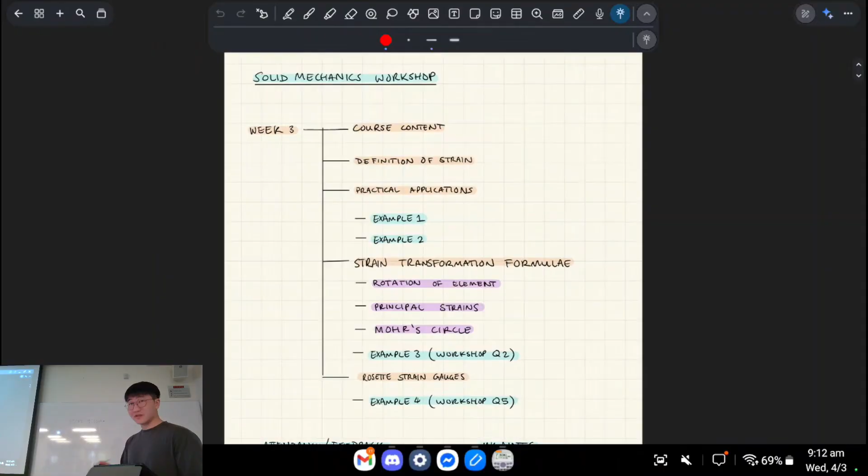Basically, today we're going to be talking about strain, and it's going to be fairly similar to the last 2 weeks in that it's fairly fundamental, similar to stress, to the mechanics of solids, and also we'll be talking about the Mohr circle rotation stuff again, basically. So yeah.

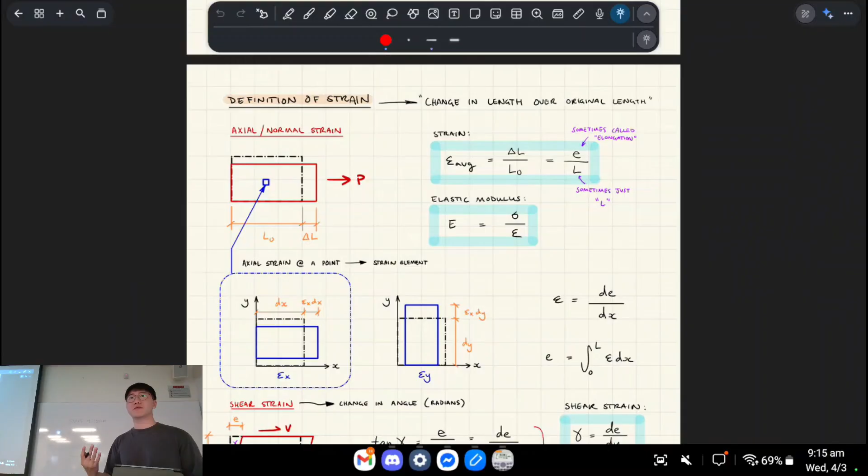It's better, like this week I've included 4 examples. It's better to see how the formulas are applied to understand this content than just see all the formulas laid out, because some of these are derivations and stuff as well. So this is like a compressed version of what you see in the lecture slides, for the formulas.

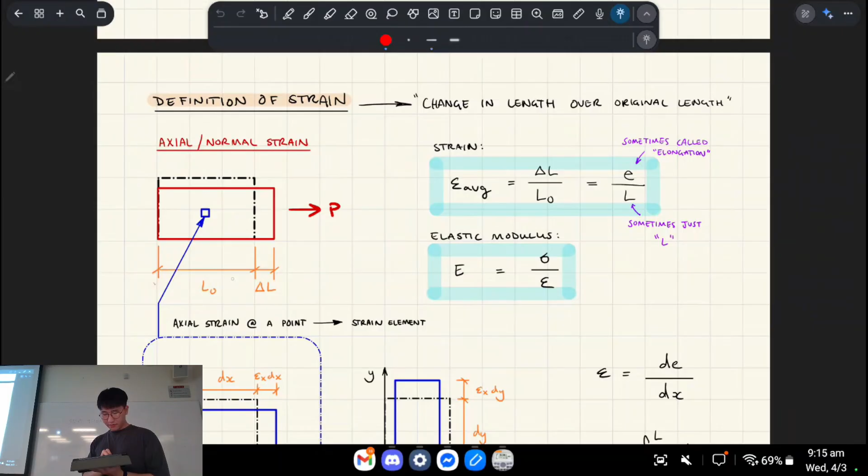But I will briefly run through them. So basically, if you imagine your solid element, similar to last week, and you're stretching it, say in tension, it's going to elongate. So if the original length of that element was L0, it's going to extend by some amount called, let's call it delta L.

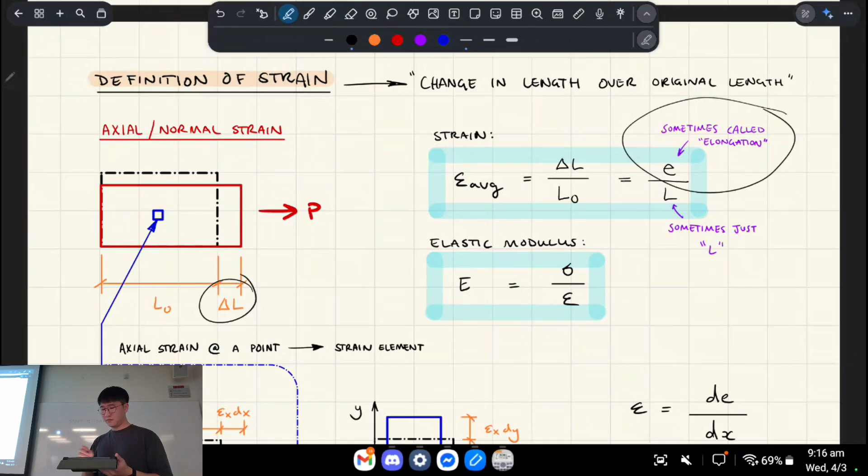Sometimes you see this as E, okay, but it's the same thing. So delta L and E, E stands for elongation, right? Same thing. And then dividing that by the original length, or sometimes it's called L.

That's what strain is, okay? That's what axial strain is, so average axial strain, I should say. So what you'll find is that this is unitless, right? So if this is in millimeters and this is in millimeters, strain is unitless, basically.

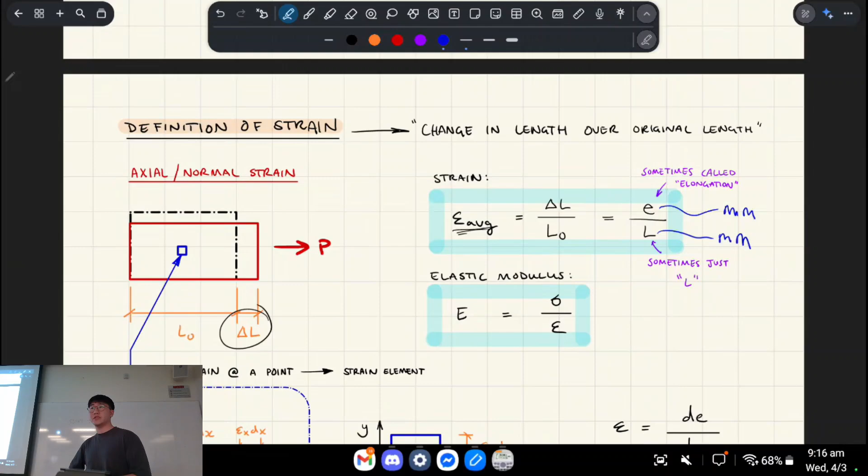Another thing to keep in mind is elastic modulus, but I actually don't think we talk about that too much here, okay, we'll talk about that next week. That's a material property, basically. We'll talk about the material curves basically next week.

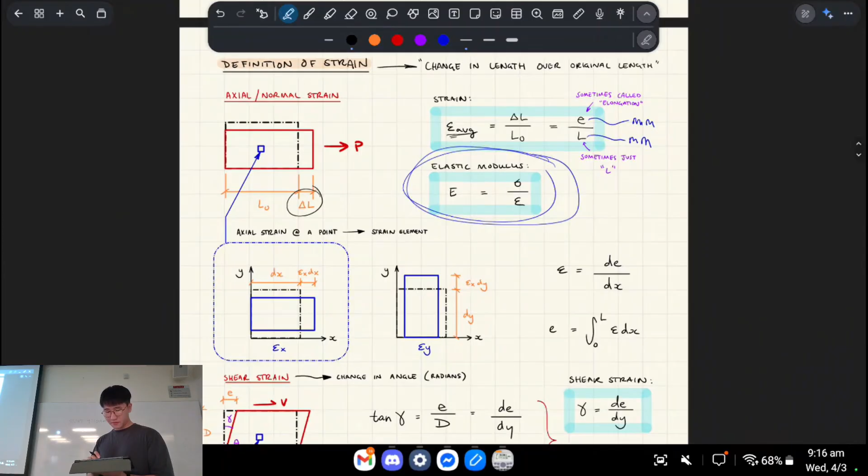Okay, so we'll also talk about next week Poisson ratio. So if you imagine like, I had Play-Doh, but I didn't bring it. But if you imagine like Play-Doh, and I'm stretching the Play-Doh, it gets thinner, like it starts necking, as I'm pulling it.

So that's like a pretty exaggerated way to imagine Poisson ratio. The idea is that as you're elongating something, in that longitudinal direction, it kind of shrinks in the radial direction, right? Just keep in mind.

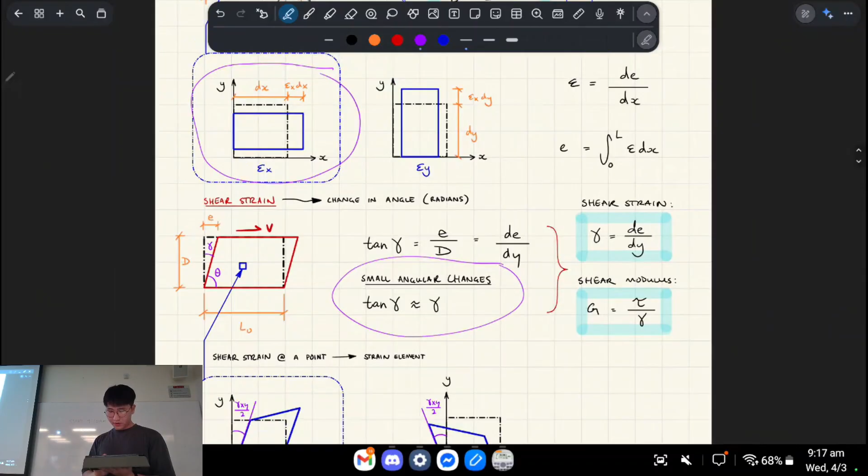Okay, derivations. Shear strain. I'll explain small angular changes in a bit, but what you have to know about shear strain is it's also this idea of something in millimeters divided by millimeters, right? But it's in a different kind of direction. So it's like you're dividing it as a perpendicular thing. So instead of longitudinal, like that's the stretch divided by the length.

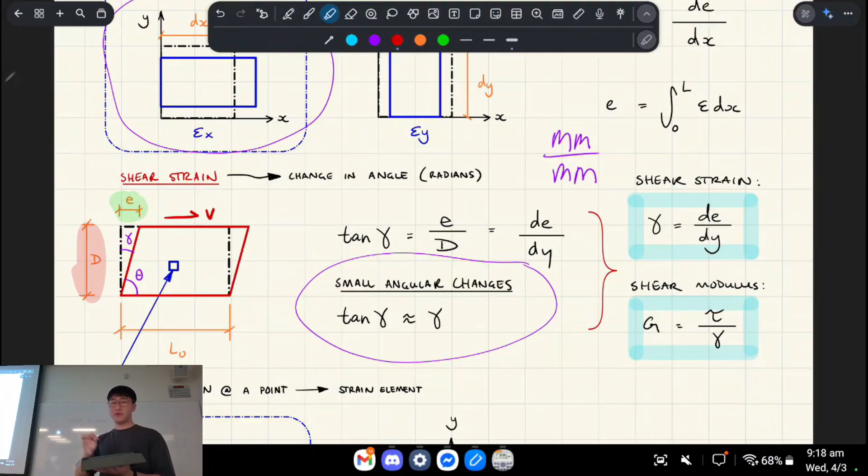This time you're doing the elongation that way, and then the perpendicular dimension. Does that kind of make sense? So if you have like a stack of papers, and you push it at the top with your hand, and you're sliding it that way, it's gonna shear. Essentially, that shear deformation in that direction divided by the height of the stack of papers, right? That's your shear strain.

And then there's also an equivalent thing to the elastic modulus, but it's the shear modulus, which we'll talk about next week. That's also a material property, basically. That's the shear stress divided by the shear strain. Okay, so these are all a bunch of formulas.

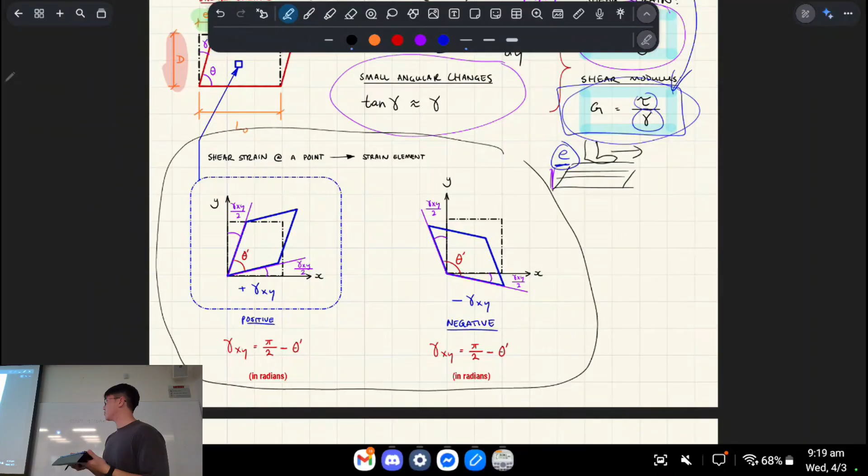All right, and shear strain on an element, you have to basically draw it out on an XY plane as kind of a rhombus, I guess. So the shear strain is this portion and this portion added up. And basically it'll be positive if your shape is narrowing in angle, like that. So that's a positive shear strain if your angle becomes more acute, right? And if it becomes more obtuse, then that's a negative shear strain. Okay, again, this is easier to see when I show you the examples.

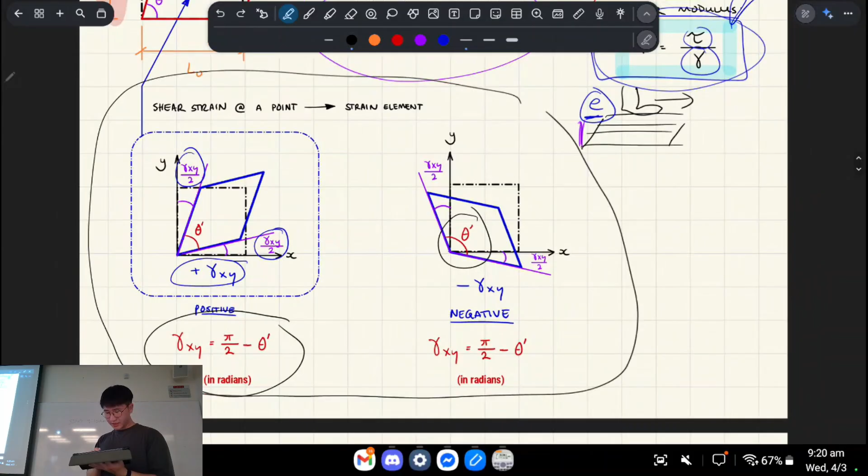But the important thing is that you're going to be mapping these in radians rather than degrees. I'll tell you how to switch that over on your calculator when we get up to that. But the reason for that is basically radians are unitless. You can think of them as unitless, right? Similar to how when you divide millimeters by millimeters to get axial strain, you get something unitless. So to map these against each other on a Mohr circle, you have to have two unitless axes, right?

Okay, that's like the overall rundown of these formulas. Does anyone have any questions about that?

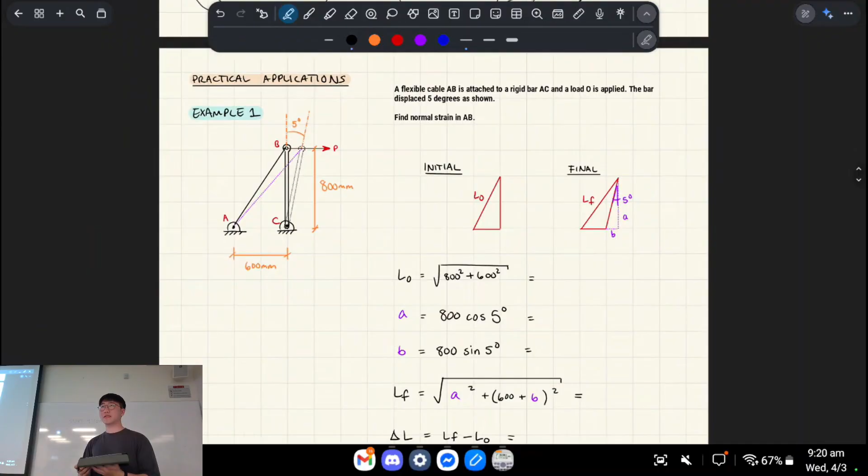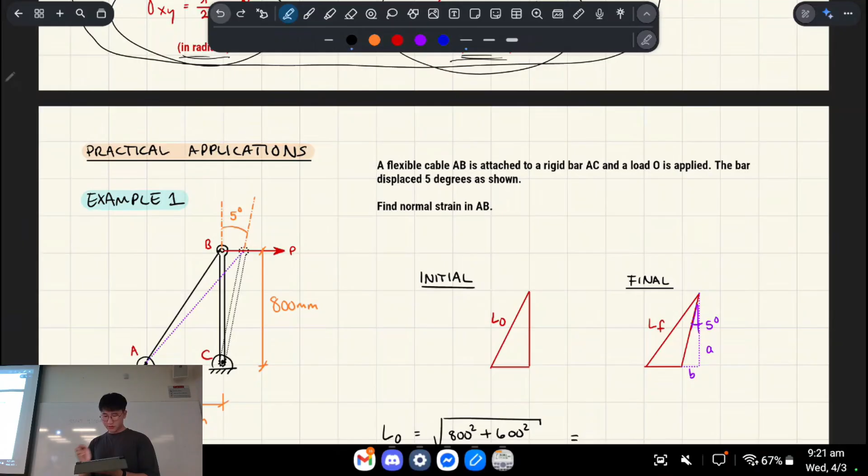Okay, cool. All right, let's start with something pretty basic. So if you imagine a rod, and it's pinned at the bottom to the ground, like a pin support kind of thing, and there's a cable that is suspending it at the top, and you pull it to the right, as drawn in this diagram. If you're told that there's a 5-degree angle change from the original completely vertical shape of this rod to when it moved a bit, I'm just gonna pull up my notes. Right, yeah, and now it's tilted a little bit, tilted 5 degrees.

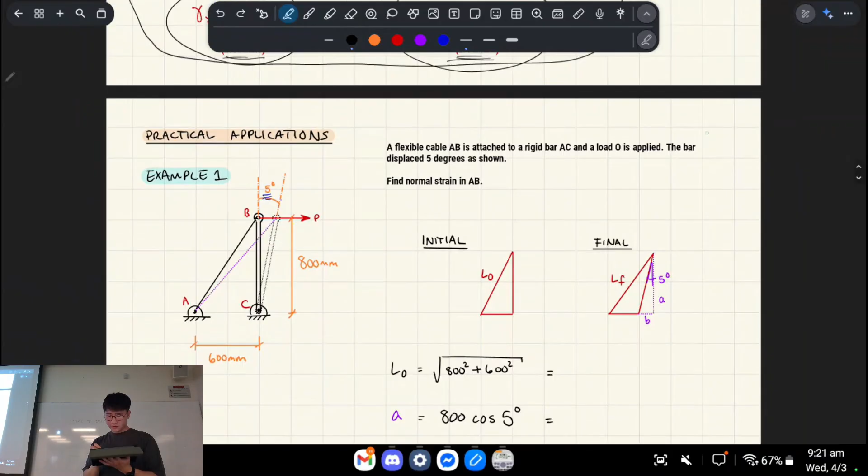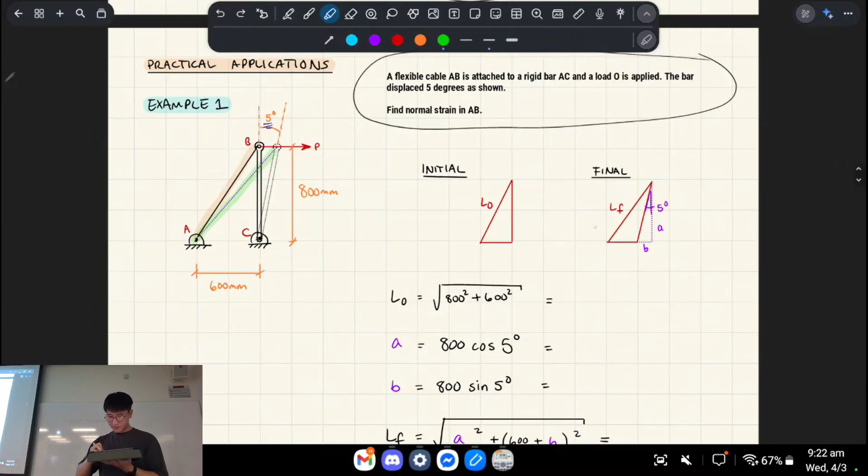It's basically asking you to find the normal strain in AB. So AB is the cable, basically. I might highlight this. So this was the original cable length in orange, and this is the final one in green. So this might be one application of strain, basically. If I highlight that again, except over here where I've drawn some triangles, the original is in orange, and the final shape's in green. Okay, so you're given some dimensions, right?

And if we use our good friend Pythagoras' theorem, we have 800 in the height, and then 600 between, I guess, where the cable starts and where the rod starts on the ground, right? That's how you can find the original length, because you just use Pythagoras' theorem.

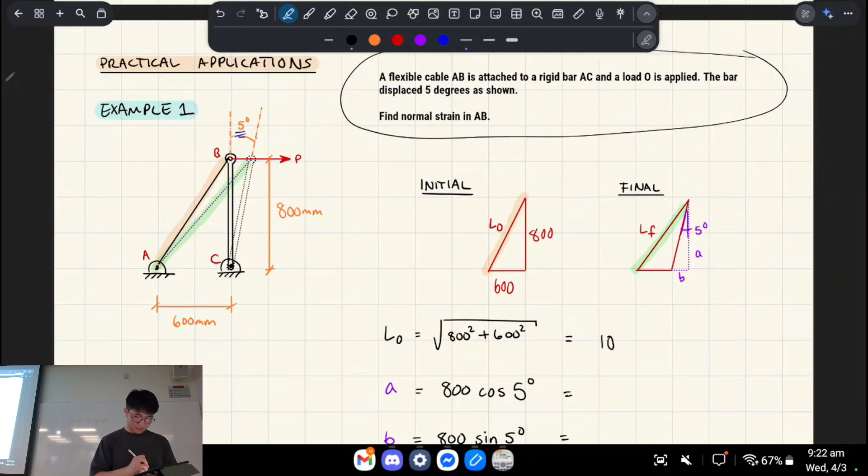Now for the final shape, basically you can use Pythagoras again, but first you have to get these additional dimensions, right? So let's call them A and B. So just keep in mind, right, I'm gonna do a little call-out thing for that one.

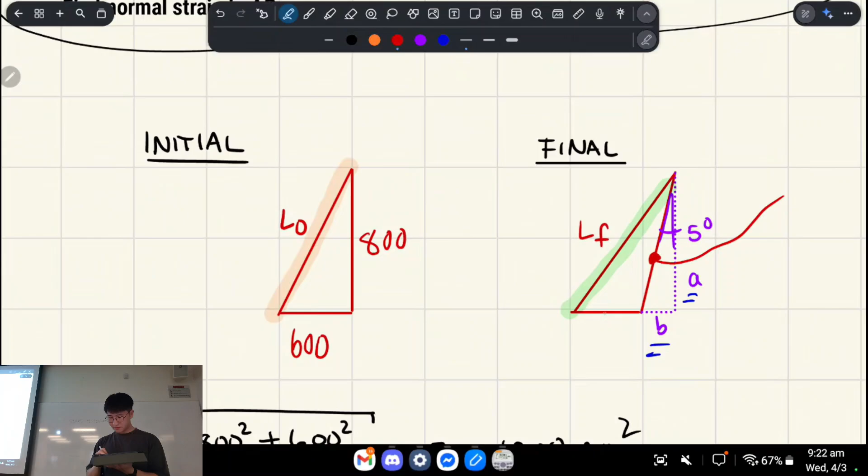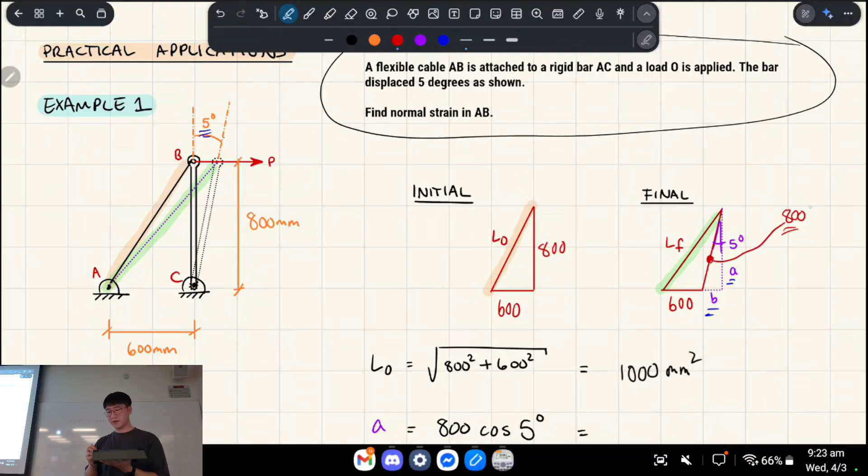In this problem, we've assumed that our rod hasn't strained at all, like it hasn't changed in length. So that diagonal red thing I've drawn is still 800 mil. So what's this dimension A and this dimension B?

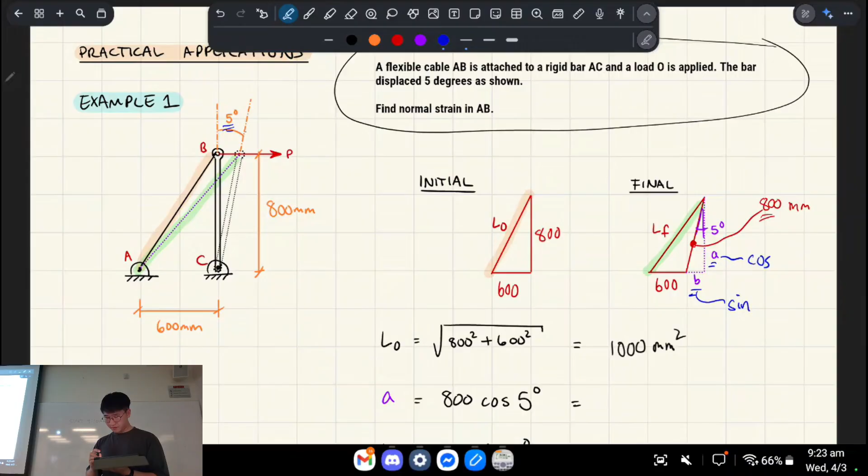If you remember your trigonometry, A is basically on the adjacent side of this angle, so we're going to use cosine, and then B is on the opposite side, so we'll use sine for that one. So A is 796.96 millimeters, and B is 69.72 millimeters.

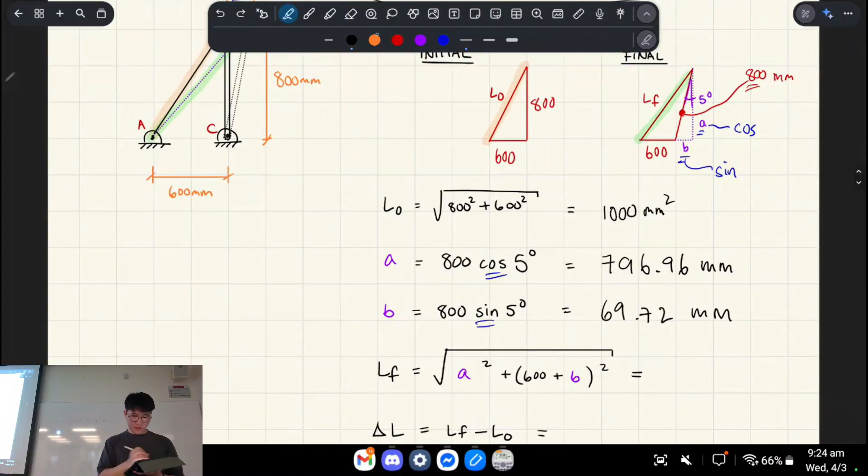Keep in mind you have to add B to 600 to get the entire length, from here to here, so we add these together. Doing that and substituting all the numbers in gives us 1040.99 mil.

If we want the change in length, like how much our cable AB has stretched, we get the final length and minus off the original length. The original length was 1000, and the final length is 1040.99, so the difference is 40.99.

So that's what we sub into our strain formula, and for L-naught, that was just 1000. So our final answer is this. And it's unitless, so no need to write millimeters for strain.

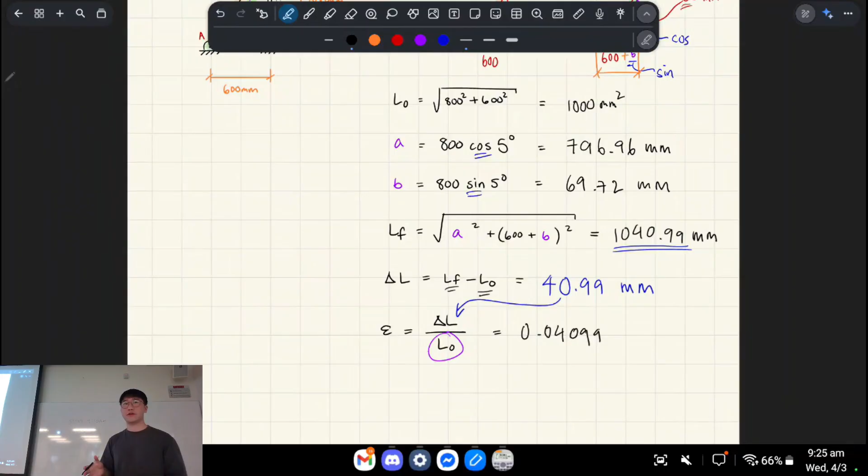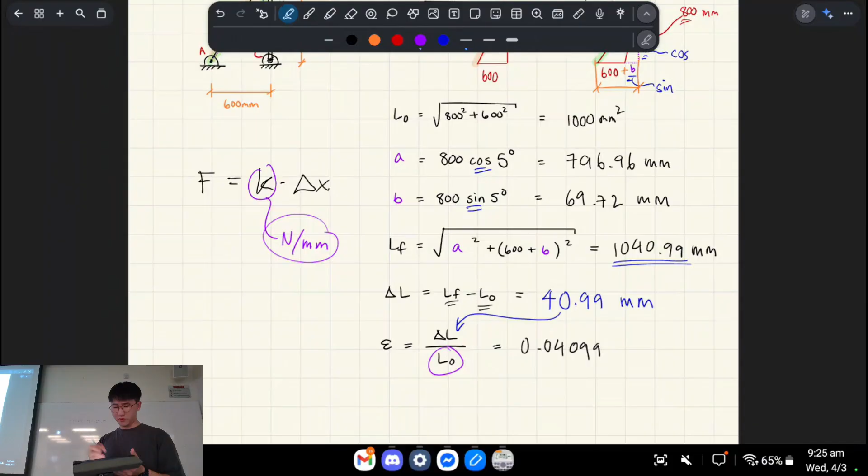If you guys remember from 1300, this might look pretty similar to when you looked at springs, because we have like this. Your spring constant was in newtons per millimeter, to do with how much force resistance it has to stretch it 1 mil, or maybe meters, but this is the amount of stretching that's happening. That wasn't a great comparison, but hopefully you can see how this all fits in. You can think of the cable as like a spring, because the cable can elongate.

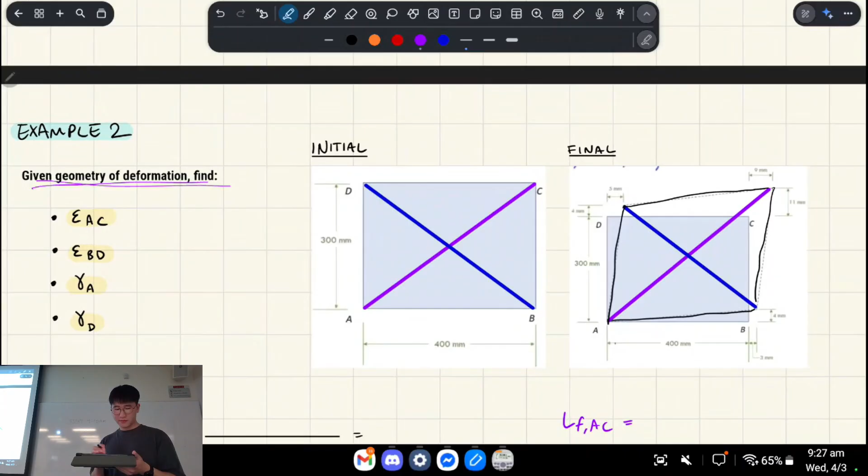So the question asked of us: given the geometry of deformation of the shape, find the strain - the AC strain, which is this diagonal, and the BD strain, which is that diagonal. Also find the strain at A and the strain at D - how much does this angle strain, and how much does this angle strain?

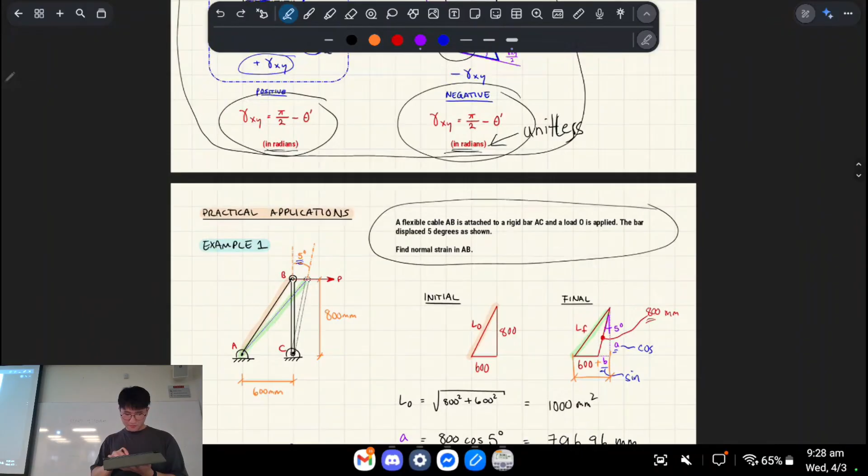Here's how we're gonna do it. The first thing is we do something similar to what we did with our cable before - remember our cable, you can think of it like a spring, it got longer. You can kind of think of these diagonals as like springs too, so how much does our spring stretch and squash?

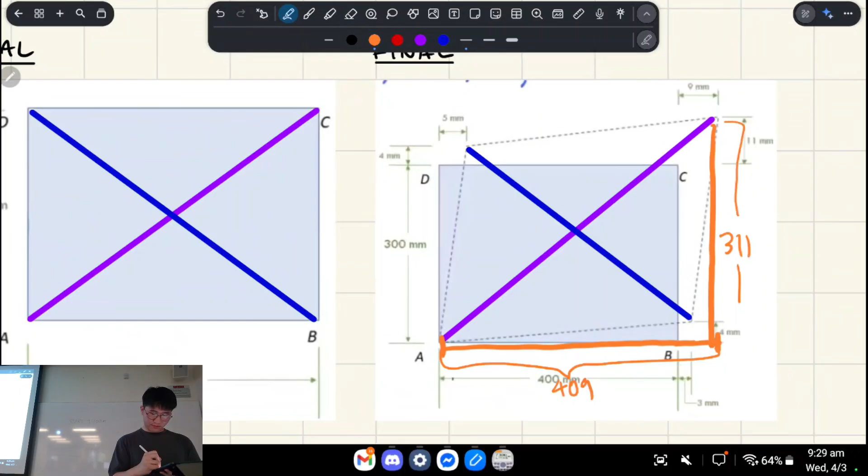We can find the final length of our AC spring by utilizing Pythagoras again. Let's focus on the purple one. In this direction, it's basically stretched 9 mil, because it's 400 plus 9, so that horizontal dimension is 409. And in the vertical direction, it's stretched 11 mil, so that's 300 vertically, plus 11 is how much it's stretched. So that's the purple one.

If I get a different color real quick, this green one, for the other diagonal from B to D, you can see that it's gotten smaller. This original dimension was 400 in the horizontal direction. It's basically shrunk by 5 on the left here, but also on the right, it's gained 3 mil.

Up and down, we've got, it was originally 300, and we have basically gained and shrunk 4 mil. So it's moved up just 4 mil. The top and the bottom have just shifted 4 mil. Does that make sense?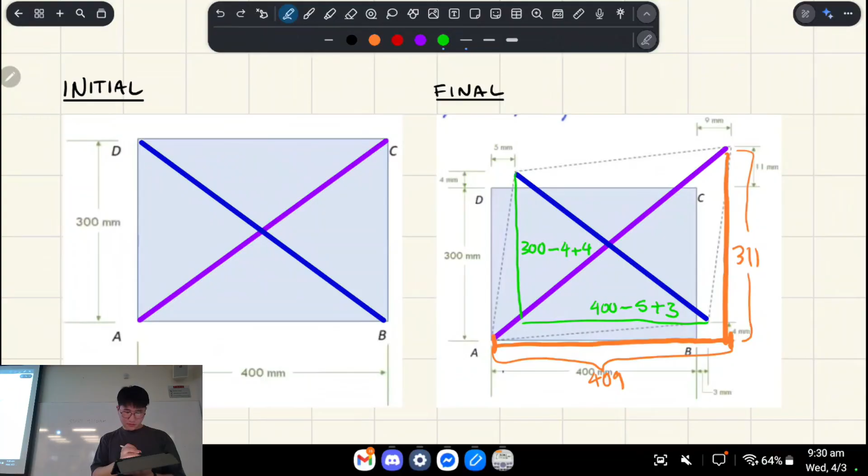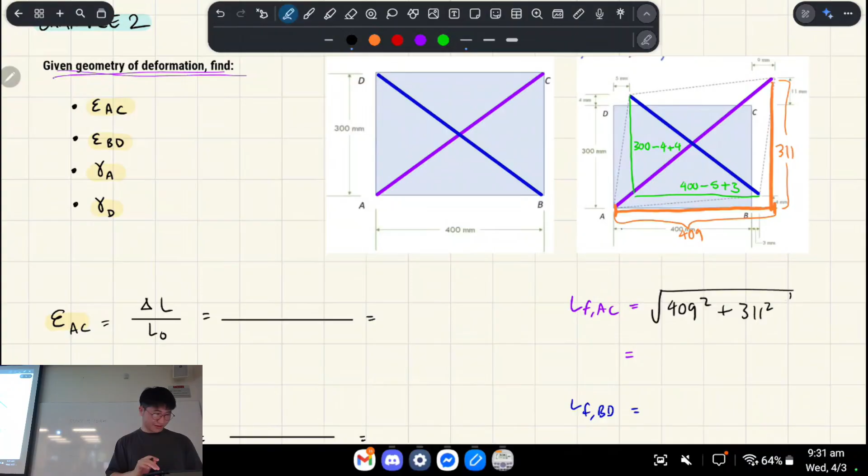Okay, concentrating again on our original diagonal, from A to C. Looking at the numbers from the orange dimensions, we can do 409 squared plus 311 squared, square root the whole thing, Pythagoras, and we get this.

What about for the other diagonal, from B to D? For that one, we look at the green dimensions, and we can see it was 398 squared plus 300 squared. So that one is 498.40 mil. You can see the purple spring stretched and the blue spring shrunk.

Cool. So change in length was the final length of the purple one minus its original length, which is 500 because of Pythagoras theorem. If it's like 3, 4, this one has to be 5, so this diagonal has to be 500.

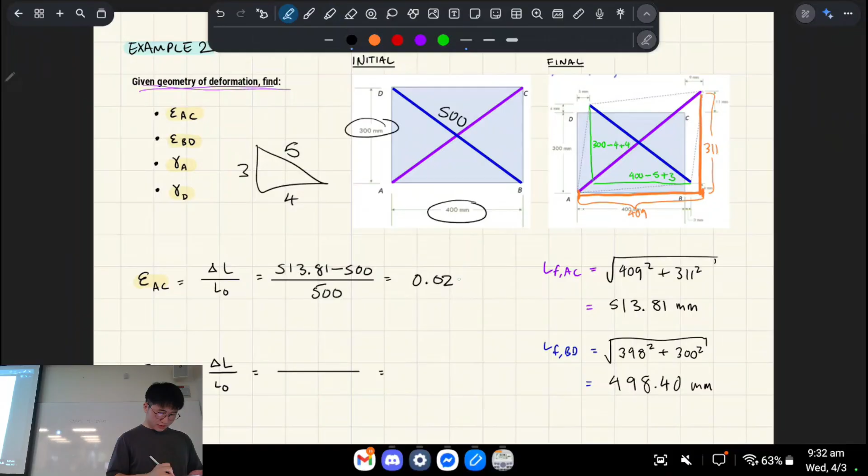We get a strain of 0.0276. Well, I mean both of these, it's going that way. But AC was the purple one, so that was the purple one, and that was the blue one. The blue one was 498.40 minus 500 divided by 500. So this one, since it shrunk, we have a negative strain.

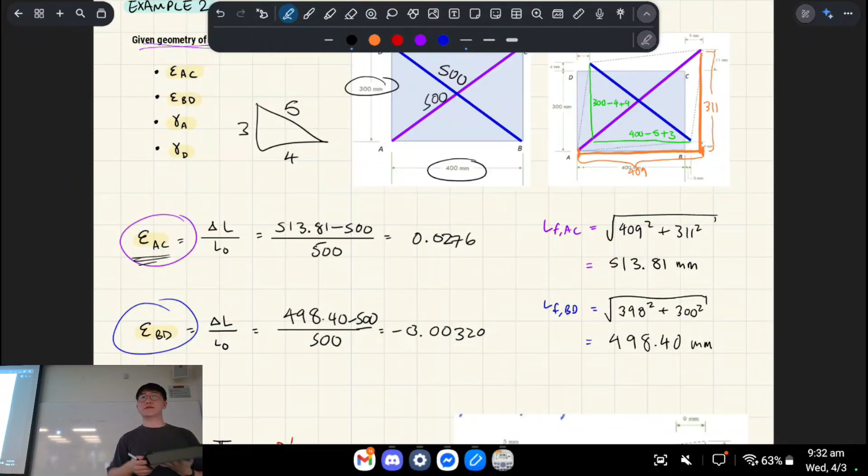So basically, if we have a positive strain, it's going to correspond to elongation. If we have a negative strain, it's going to correspond to a squashing. Does that make sense? Does anyone have any questions so far?

Because now we're going to be talking about the shear strain. That's the axial strain. Okay, so for the shear strain,

we're looking at gamma A. Gamma A is basically made up of these two angles. So where does that come from? If you look at these formulas again, let me just delete all the fluff that I added. Just concentrating on this part here.

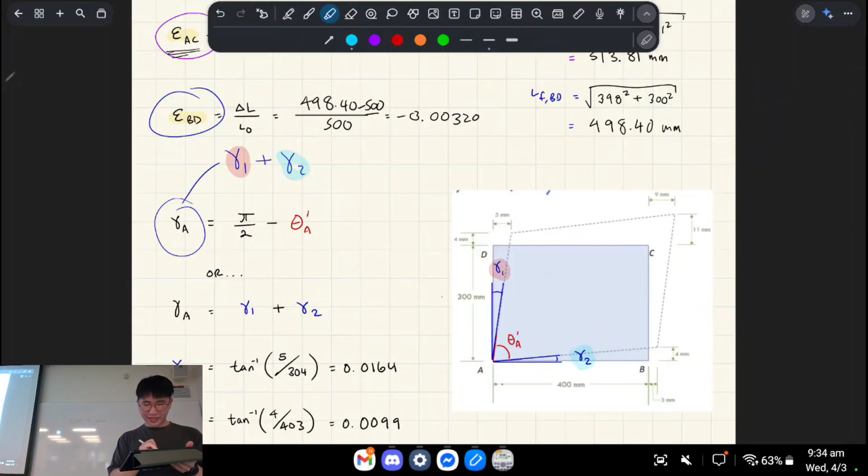What's this letter? Gamma, sorry. Gamma xy is equal to gamma xy divided by 2 plus gamma xy divided by 2. So we're collecting these two shear strains, and that's what gives us the overall shear strain. Going back to this and how that applies, basically if we get this gamma 1, highlighted in red, and this gamma 2, highlighted in blue, we add them together, that's what's going to give us the shear strain at A. The shear strain at A is both those components added together.

So how are we going to do that? If we get pi on 2, which is 90 degrees, and we subtract off that angle here, then we'll get it basically. That's one way to do it. The other way is just adding those two angles together, which is the way that we'll do it, I guess.

So if we do tan, here the amount that it's changed that way is 5 mil. And then the amount that it's changed - sorry, it's not a good example, I should draw it very thick, I might draw it in red. There we go. So that dimension is 5, and that dimension is 304. So if we do tan to the minus 1, we can get the angle. Because theta equals tan to the minus 1 of rise over run. To get the angle, you do tan inverse of your rise over run, if that makes sense. So the rise is 5 mil, and the run is 304.

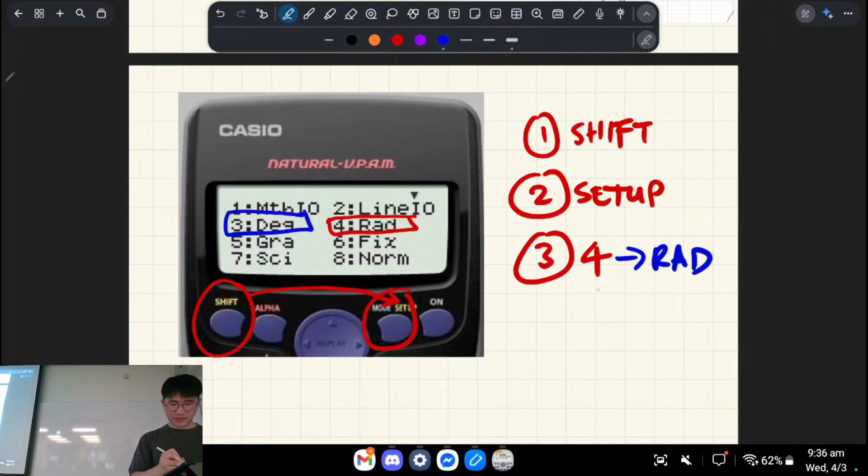Step 2, you click setup, and step 3, you click 4. That brings you to radians. Similarly, if you want to swap back to degrees, you just click 3 instead, and that brings you to degrees. So we want these in radians, basically, because they're unitless.

We do the rise over run here. 4 is the rise, and 403 is the run. So we do tan inverse of rise over run. That gives us 0.0099 in radians. If we add those together, we get A.

This is equal to that plus that, so we just add these two together. It gives us 0.0264 in radians.

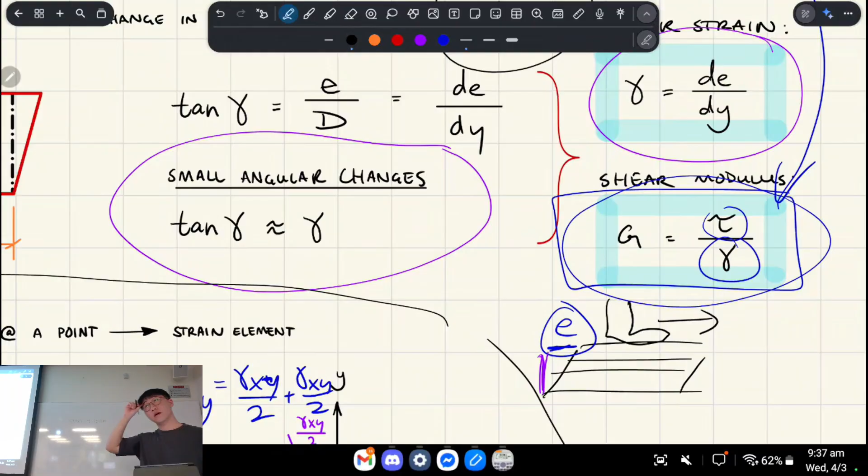I'm going to quickly talk about the small angles rule, which I briefly mentioned in the formulas. For small angle changes, tan gamma is approximately equal to gamma. So why is that?

Modeling this on Desmos as an example, I've taken this one: gamma 1 was 0.0164. Basically, if I do tan inverse of 5 over 304 and punch it into the calculator, you're gonna get 0.0164, assuming you're in radians. That's the answer you get.

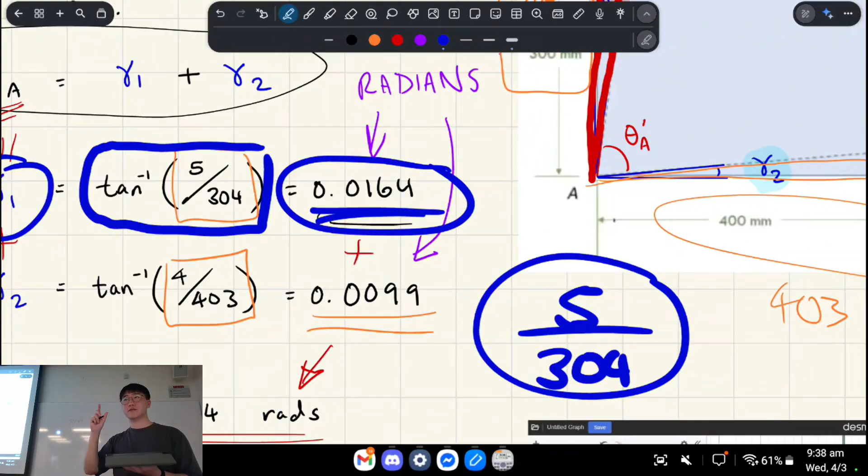But if you just type this into your calculator without the tan, you'll get a very similar number. It's because for small enough angles, like in the case of strain, straining something won't really change this angle very much. It won't be a big angle. So they're very similar numbers—if you round to 4 decimal places, you'll get pretty much the same result.

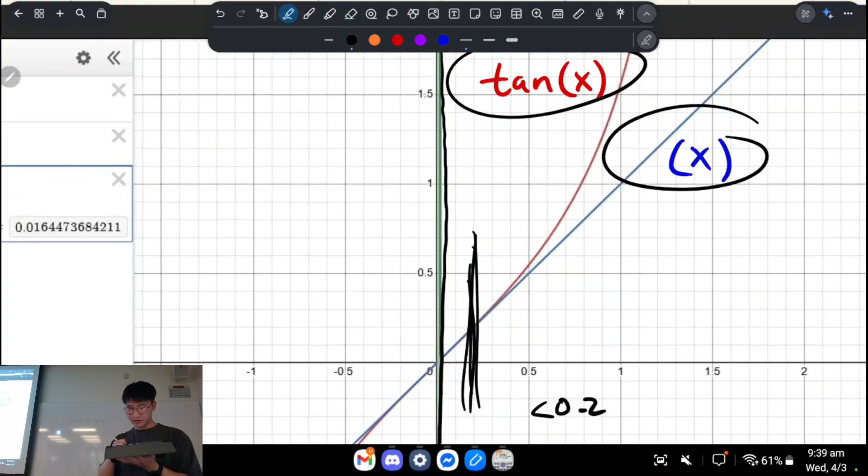Looking at this Desmos graph, we're in the region around here for x. If you model it, they start to diverge at a certain point. It's kind of subjective, but if your number is less than, say, 0.2, you're completely fine—these numbers will be so similar that to 3 or 4 decimal places they'll be the same. Does that make sense? So that's the small angle rule.

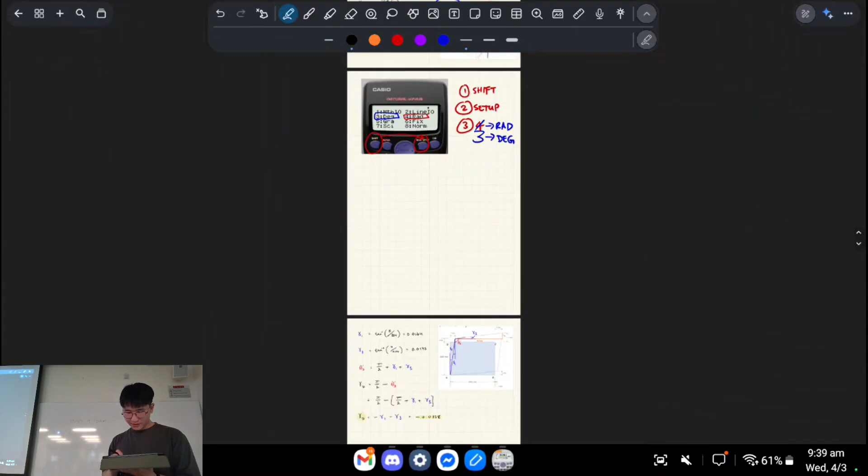Just finishing off the question—the other part was asking for gamma D, the strain in this corner. That strain is basically these two shear strains added together. We know the first one's the same because the Z angle rule says that if this angle and this angle are parallel like this, then they're equal.

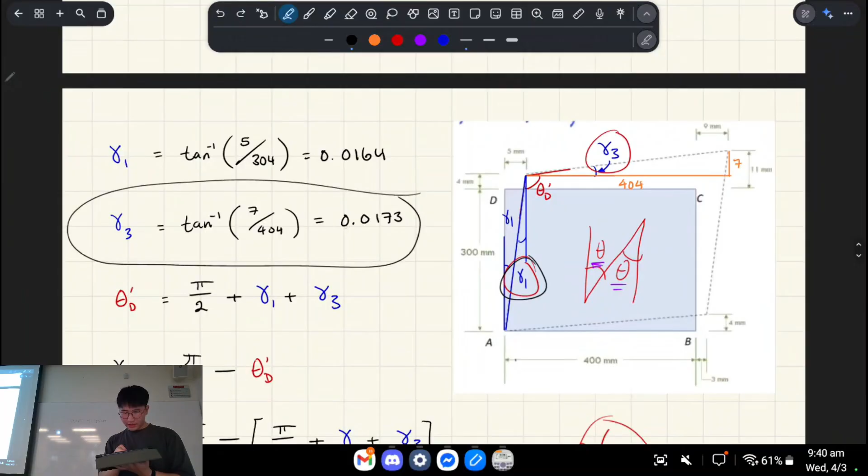So we can reuse gamma 1 from the first part. Gamma 3 is what we have to work out, and you just do the rise over run. When you add these together, you get gamma D.

The other thing to mention—I think the reason I did that is to prove that it's negative. So this gives us the magnitude; if we add these together we just get the magnitude. But remember how before I said if your angle goes from a right angle and becomes obtuse, you get a negative shear strain—that's the sign convention.

That's this one—it's widening, except in our case it looked like that, and we were observing from this top left corner, so the angle's getting more obtuse. Are people following? I don't know, okay, cool.

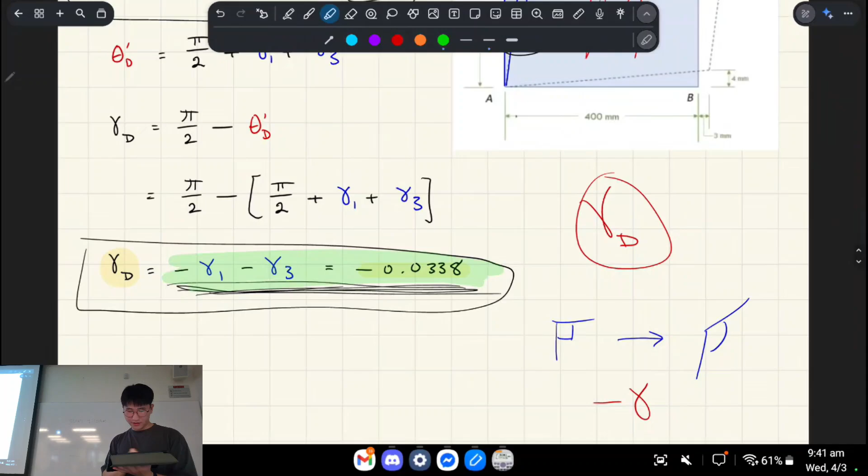Anyway, point is, it gives you a negative shear strain. So you can just add these together, but then make it negative because you know a more obtuse angle makes it negative—or you can do all this derivation to prove it.

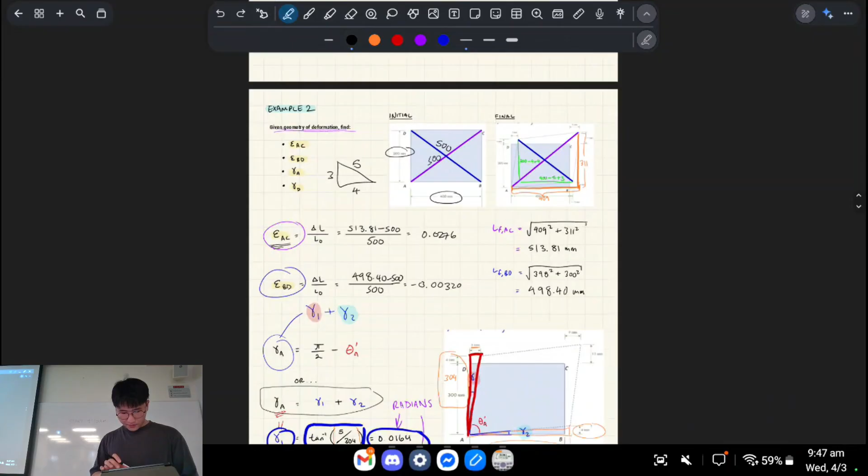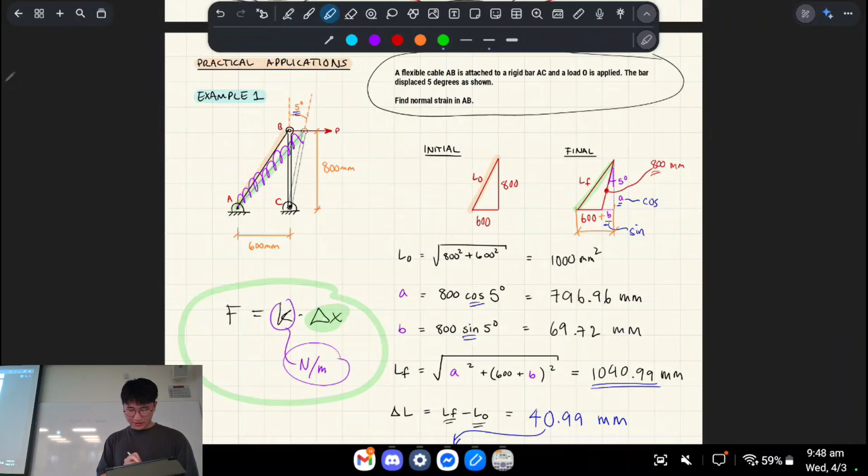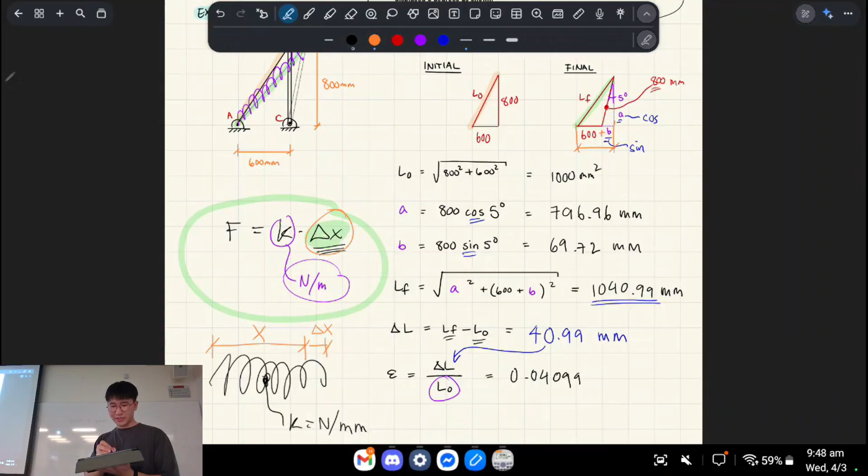So I realized what I was trying to say with the spring thing, right? So I brought up this formula, from 1300, you might remember this part. So the delta x, right, for a spring - its material property is that it has a spring stiffness in newtons per millimeter. What I was trying to say is that its displacement, so if that's its original x length, its displacement was delta x. This is very similar to what you're working out here for axial strain. That's the analogy I was trying to draw.

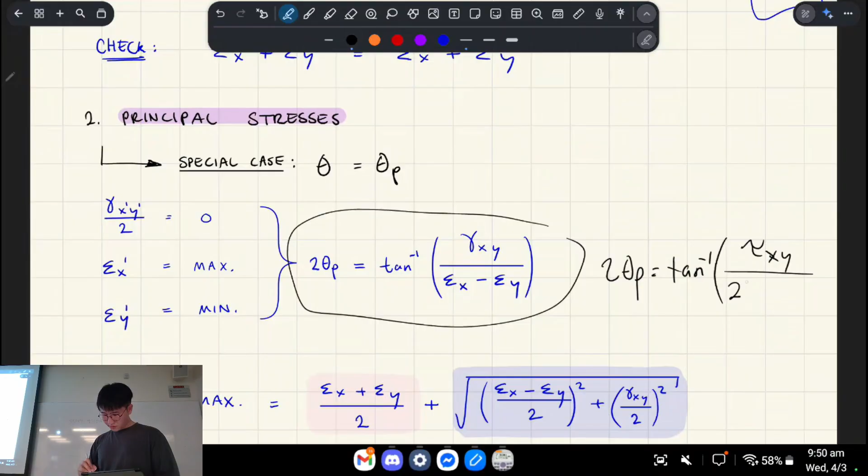So anything different? I think before this formula looked something like tau xy over 2, or was it 2 at the top? I think it was 2 at the top. I'd have to double check, but there was a 2 at some point, right? But you can see that cancels out because gamma xy is divided by 2, do you know what I mean? Okay, yep, so that should look pretty similar.

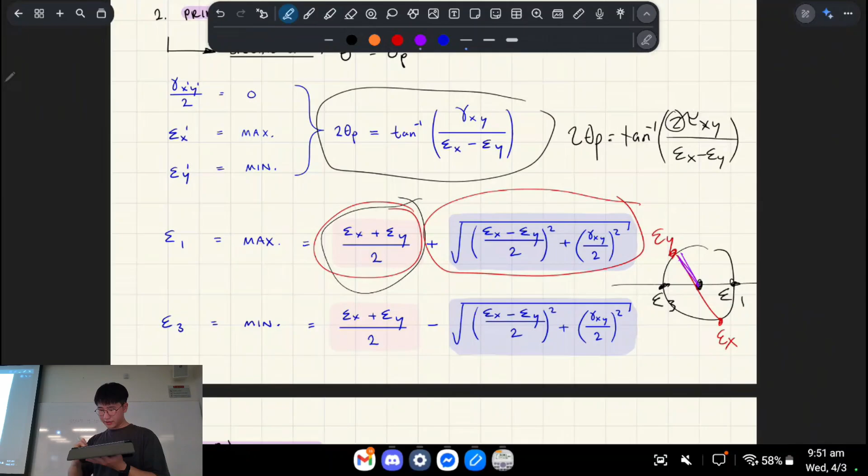That's just the middle. So you got the Mohr circle, right? You have your principal angles, principal strains. Your biggest one is epsilon 1, your smallest one's epsilon 3, right? The middle is your average between them. So that's that and that, or in this case, if we're given values like x and y, you're just trying to find the middle of the circle by averaging those values. And then this is your radius, that thing in purple. That's the radius. Okay.

Mohr circle again should look pretty similar. We're graphing it so that it's gamma xy on 2 on this axis.

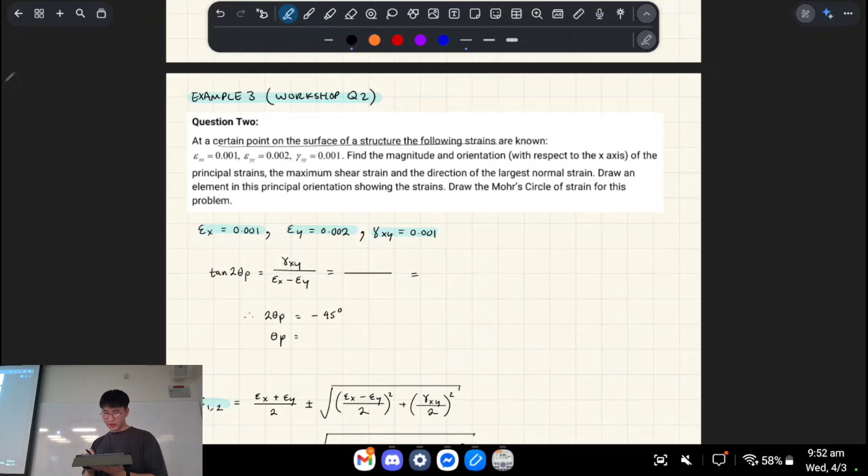So let's look at an example, because hopefully it should make more sense. There's a point on the surface of a structure, and the following strains are known: strain in the x direction is 0.001, strain in the y direction is 0.002, and strain xy is 0.001.

Okay, so the first thing we do is we can substitute in numbers to find our principal. Oh, actually, wait, before we do anything, let's think about this element for a second.

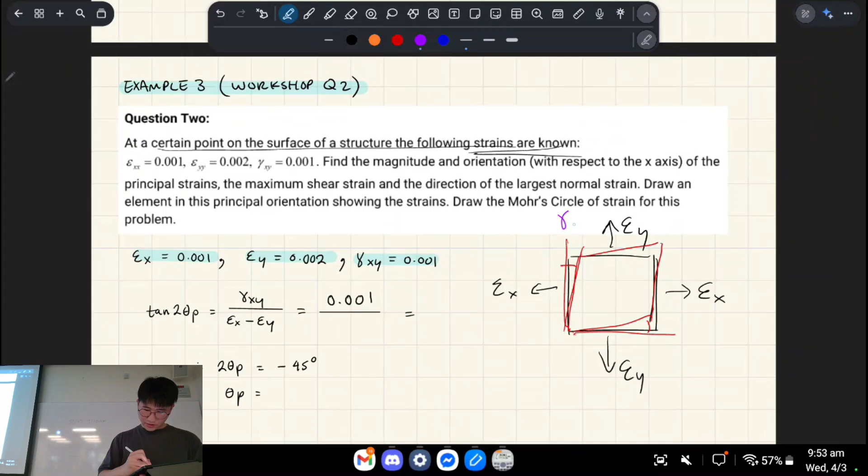So the strain in the x direction, the strain in the y direction - the arrows are pointing away from the element because they're positive, right? And we have a certain strain, which, sorry this is hard to draw, it's like that. Let's call that gamma xy on 2, gamma xy on 2, like that. And so gamma xy is 0.001. So that's kind of what our strain element looks like.

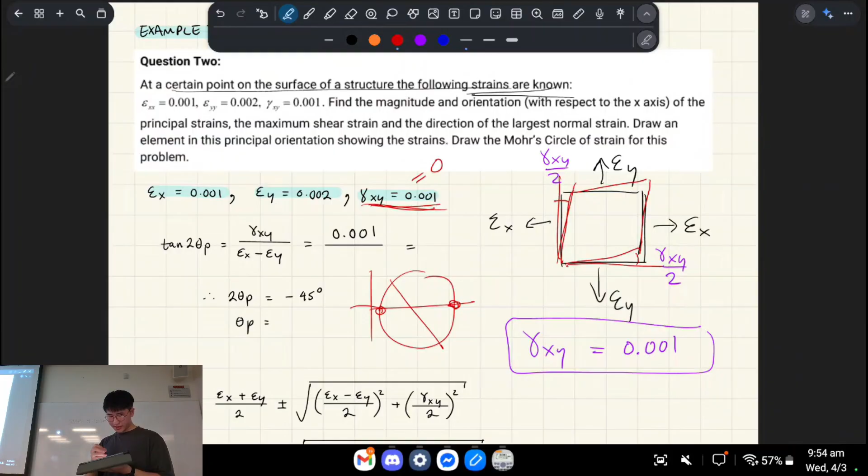So if you have a shear strain that's non-zero, what does that imply about where this sits on a Mohr circle? Basically, if you're given that this is a non-zero number, so it's not equal to 0, on a Mohr circle we know it's not sitting here and here, because if it was principal, this thing would be 0. So we already know it's going to look like this, or like that, or whatever, you can figure it out. But yeah, so we're working with something that's not the principal, okay, to begin with.

So we have to find the angle to get to the principal axis, that's theta p. So how do we do that? We chuck in our formula. So that's the point, I guess, right?

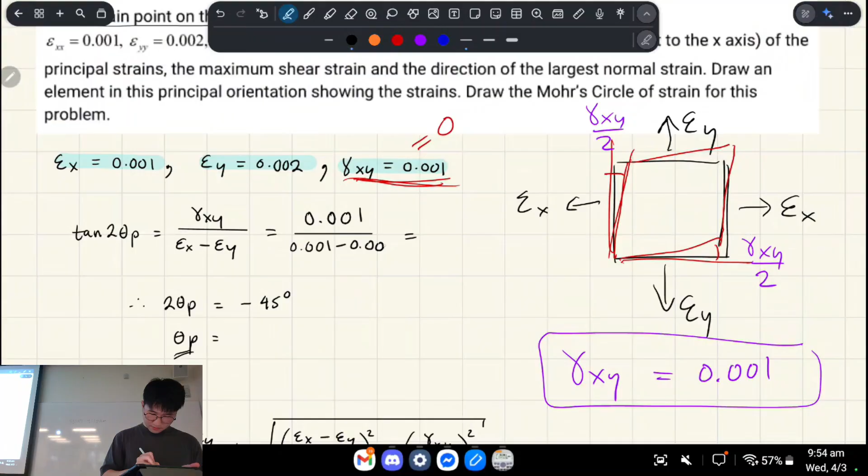So that gives us -1 for this whole expression. What we can do is go tan inverse -1, tan inverse -1, and... oh wait, crap, what am I doing? Sorry, I skipped a step here. Basically it's like this: tan inverse -1, like that, right?

We do that on our calculator, and remember to change your calculator back to degrees for this specifically. You're going to be pivoting between radians when you're doing the shear strain and trying to find it based on a real geometric shape, doing the rise-over-run stuff. But if you already have that value, I'd recommend changing back to degrees when dealing with the Mohr circle, right?

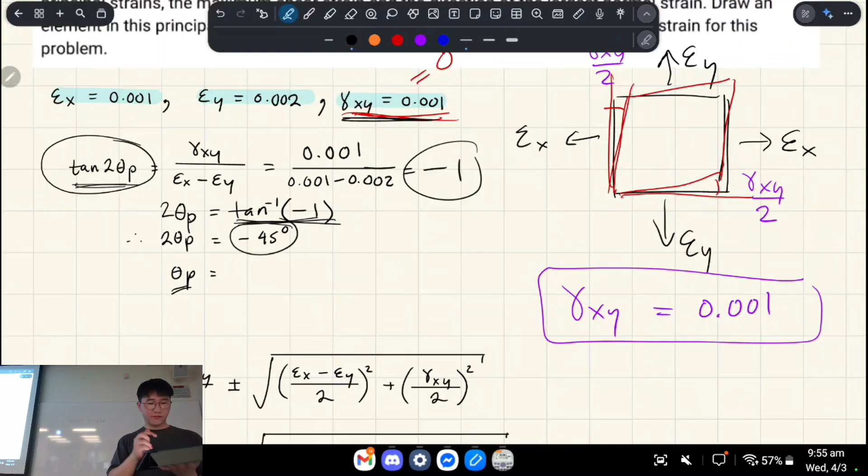If you're in degrees and you type tan inverse -1, you'll get 45 degrees, -45 rather. You divide that by 2, and we get that the degrees to get to the principal axis is -22.5. Okay, cool.

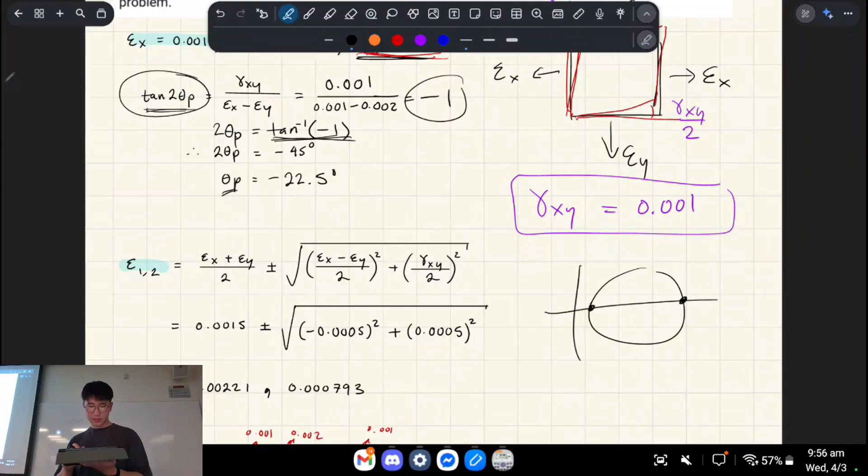All right, so next we find on the Mohr circle, we're looking for here and here, the minimum and maximum axial strains. How do we do that? We do the center plus or minus the radius, going that way or going that way. Subbing in these values: we have 0.001, 0.002, etc.

Okay, you can kind of see how these numbers are subbing in, and we get 0.00221 and 0.000793. That's the smaller one, so that's going to go here, and this is the bigger one, so that's going to go there.

Sorry, I've been a bit inconsistent. Sometimes I call it epsilon 2, sometimes epsilon 3, but it's the same thing, right? It's the smaller value for your principal axis, the principal strain.

Cool, so next we're going to find the max value. On the Mohr circle, we want to find this thing here, we'll call it gamma max on 2. To find that, you sub into this equation.

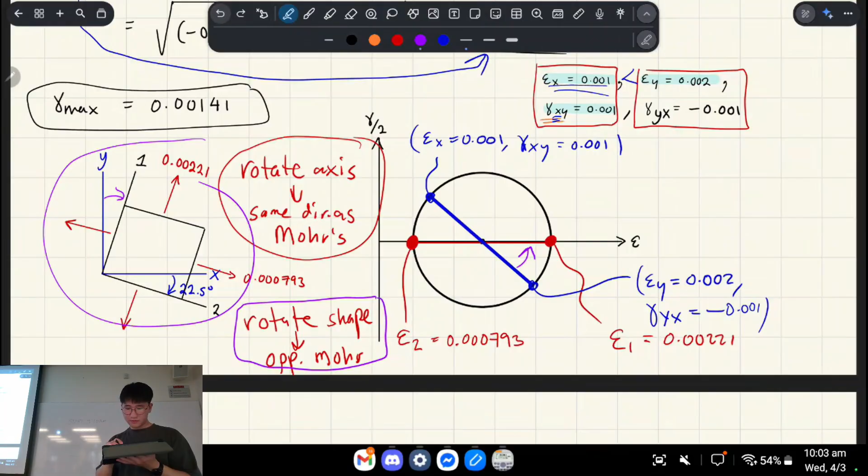And the other thing you have to remember is on the Mohr circle, whatever angle you rotate the principal axis by is double what you calculated, right? So this is 2 theta p, which gives 45 degrees, okay?

And the last thing we want to put in is here. So remember, epsilon is your... what's a good way to call it? Maybe the average? This isn't a legit term, maybe it's just epsilon middle, okay? So if I get this one and this one, for example, and add 0.001 and 0.002, and divide by 2, you get this.

Yeah, and so that's what I was trying to say over here. That's the middle of your circle. In terms of how far up and down, this is the positive value, so we just plot that in.

Oh sorry, I should say gamma max, maybe we'll call it. Okay, does that make sense? I've got one more example, right? But I can see a few people copying down, I'll just give you like 5 seconds or so. Okay, sorry, I'm going to move on.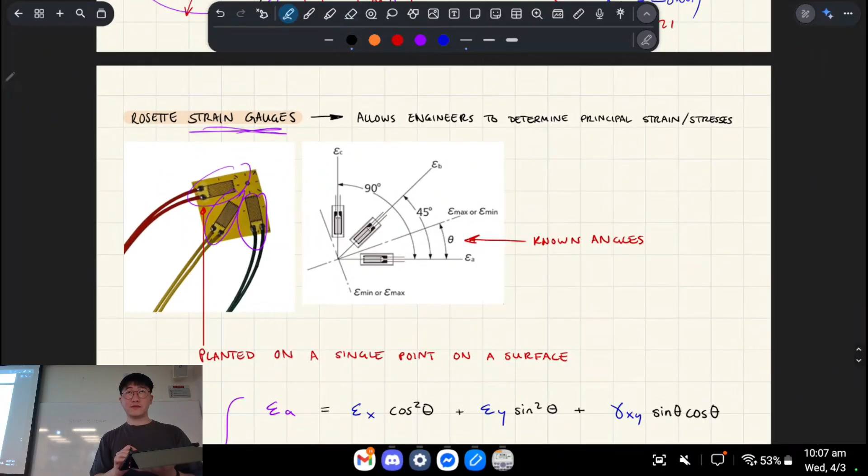Wait, hold on, am I cooking too hard? Sorry, okay let me take a step back. A strain gauge records one value, right? So this strain gauge would record strain A, this strain gauge would record strain B, and this strain gauge would record strain C. So they're very dumb, they can only do one thing, and the purpose of it is to record strain in a one-dimensional direction. So you point it in three different directions, right?

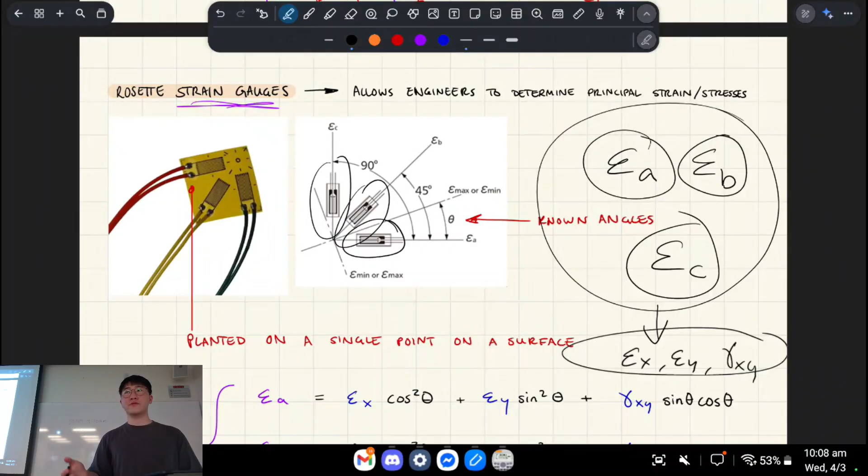It's gonna give you all this information that's gonna let you work out strain X, strain Y, and gamma XY, and that might be useful on a certain point in your structure that's critical that you want to measure. So for example, a bridge, you might want to monitor the health of the bridge to see if it's straining too much before you need to go in and repair it or something like that, right?

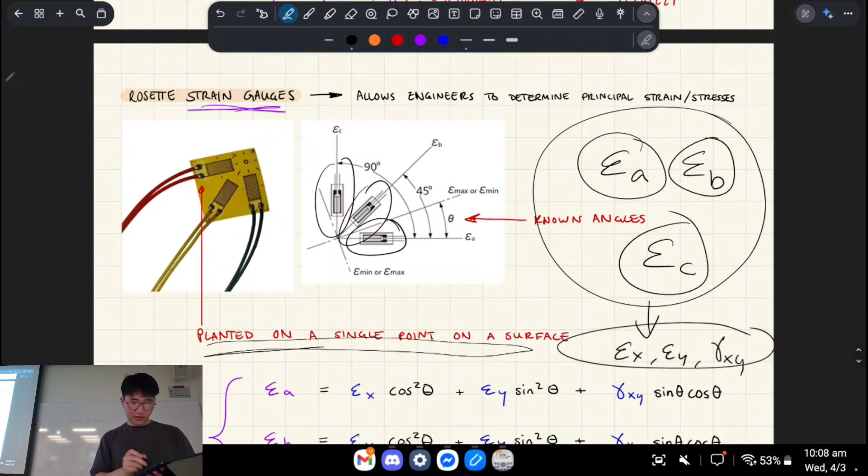So it's planted on a single point of a surface on a structure.

All right, so simultaneous equations. This looks nasty, but I think it's fairly straightforward. Solving the simultaneous equations, I'll be honest, I just use MATLAB. I don't think you really have to solve these by hand. If this is in your week 4 online test or block test, since it's online, you're allowed to open MATLAB and do all this stuff. So I'm going to teach you this with the assumption that you don't have to row reduce by hand or solve three simultaneous equations by hand. Do you know what I mean?

I'll just teach you how to set up the matrix and how to punch it into MATLAB—or wait, I meant Symbolab or Wolfram Alpha or whatever, you know, the math solvers. I'll just teach you how to set up the equations.

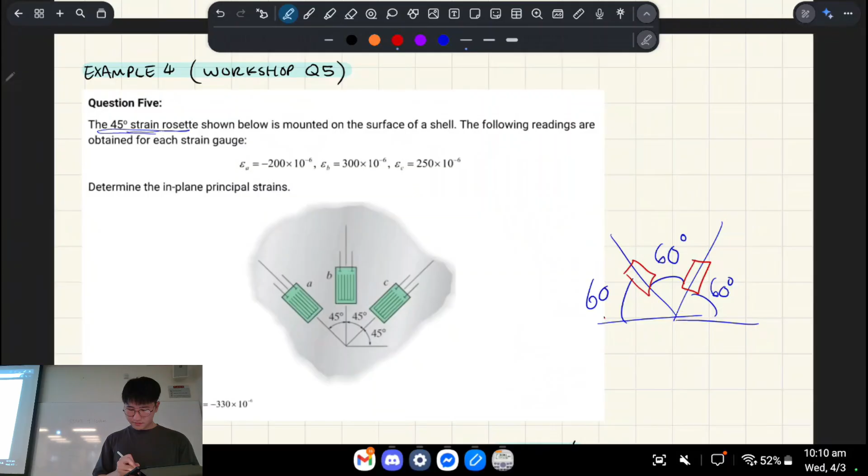So we're told that a strain rosette—by the way, there's generally two types: the 45-degree ones, and one for 60 degrees, I think. So that's 60 degrees. Sometimes you see this one as well. You might have it like that, or like that, or whatever. Doesn't matter.

It's mounted to a surface, and here are the values that it's outputting. So for this one, the first thing to keep in mind is that all these angles are measured from a reference. You can technically take the datum, or reference angle, from wherever you like, but it's advantageous to take it from here. You can think of it like the unit circle from high school—if you remember, the angle is measured counterclockwise from the unit circle. That's one way to remember it.

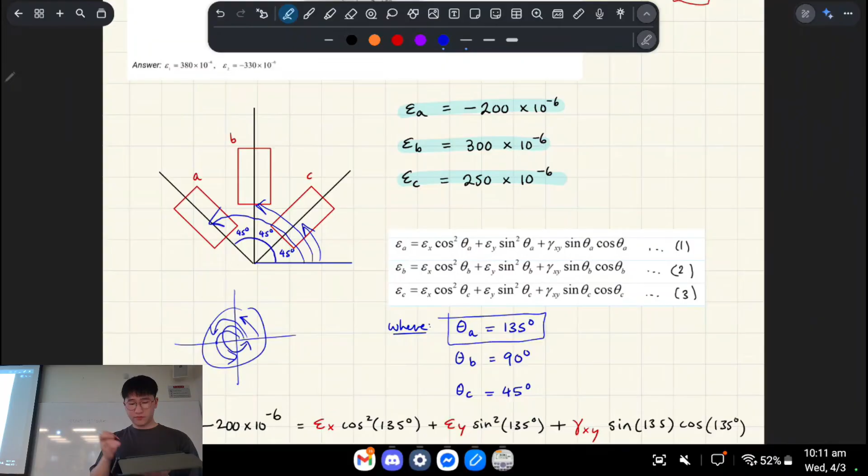So the angle of strain gauge A is all the way over here, so it's 45 degrees times 3. The one for B is 90 degrees, and the one for C is 45 degrees. So it's just adding 45 each time.

Give me one sec. All right, great. So basically, if you go onto your calculator and make sure you're in degrees, you just type these parts in. By the way, if you see cos squared, what you do on the calculator is type cos 135 degrees, but the square is applied afterward—so it's as if you're doing cos 135 times cos 135. See what I mean?

So basically that gives you 0.5, and that gives you 0.5. These two multiplied together—like I said before, this is basically sine 135 times sine 135, that's what the squared thing is doing. Here we have sine 135 multiplied by cos 135. So if you see that pattern, all right.

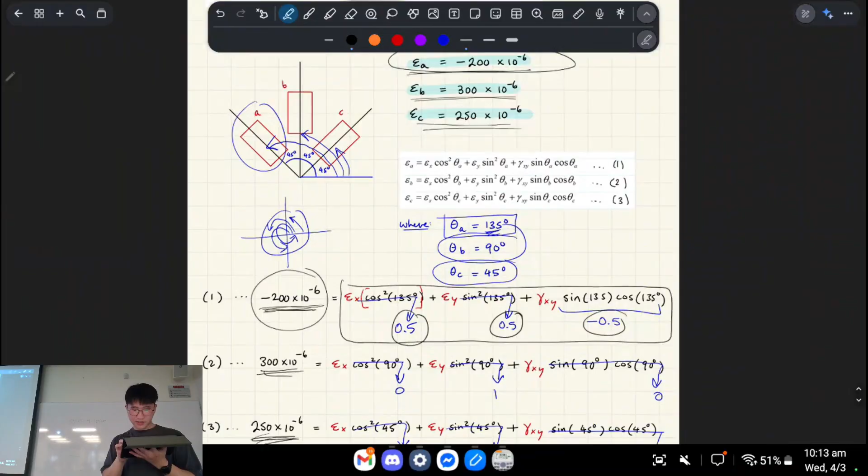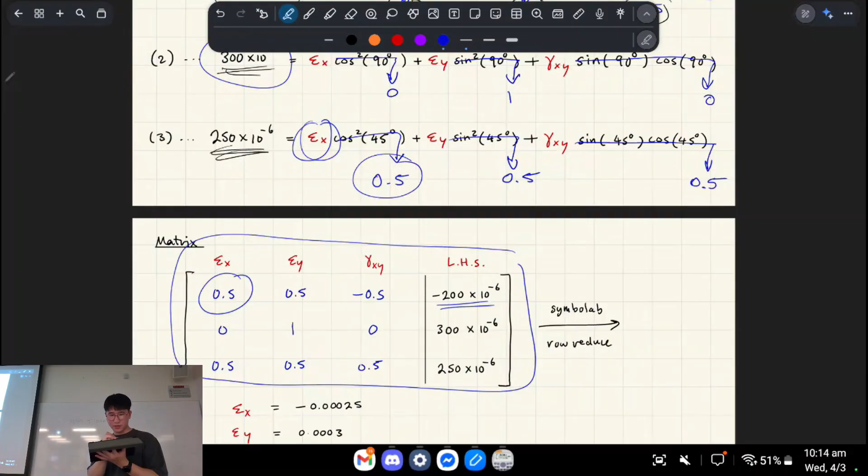So basically I've set up 3 equations. What you do is take the number provided on the left-hand side of the equation, and apply this long formula for each of them. So basically, if you're setting up a matrix, the left-hand side goes on the right—you swap the sides, you know what I mean. So the left-hand side, we treat as the right-hand side for the purposes of setting up the matrix. And it's each of these constants in front of our variable. So if our variable is epsilon x, it's a constant which we calculated, for example, as 0.5. So you put the constants in for everything.

Each row represents an equation, right? So that's equation 1, that's equation 2, that's equation 3. That's what you can put into Symbolab, and you can row reduce it. I can show you guys that maybe at the end.

Epsilon, I keep saying the wrong Greek letters. Epsilon x is equal to whatever's on the right-hand side here. Then epsilon y is equal to whatever's on the right-hand side here, and then gamma xy is equal to the stuff on the right-hand side here.

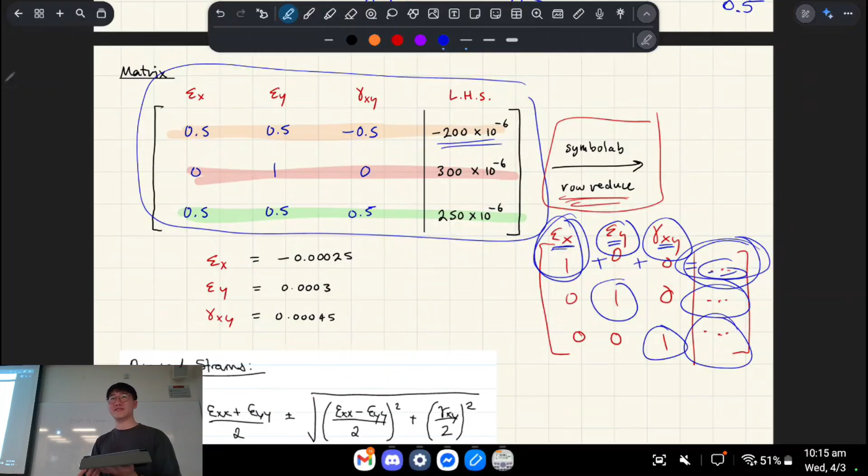So row reduce, and that gives us these. So that's what was on the right-hand side.

Okay, the question asks a bit more from us. I got this from my friend who's working it out because she used to teach this course, and I couldn't do a better job than her, but yeah, principal strain.

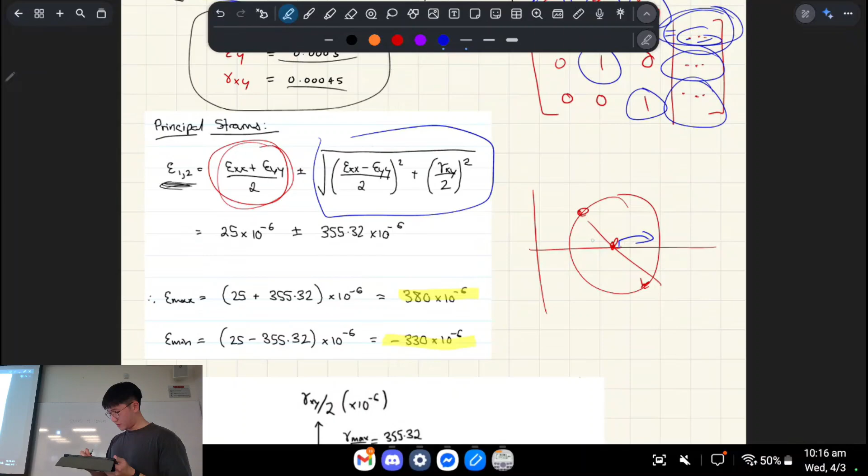So we're doing the same thing. We're just finding the principal strain by getting the average, like the average here and here, the middle of the circle, that's that. Plus or minus that much gives us that. So you can find max over here, min's over here.

And yeah, so you can plot the whole thing out. What she's done, which is actually quite clever, is you can basically map the axes so that they're times 10 to the negative 6. So instead of getting numbers like 0.0001, you might call that 100 times 10 to the negative 6. So it just looks nicer because you're writing numbers like 100. That's just an arbitrary example, but you'd be writing numbers like 380 instead of decimals all the time.

That's pretty much the workshop. What I might do is quickly show you what it looks like on Symbolab. So you might go like this, matrix. Before we had 3 equations and 3 variables, but you have to add one more matrix on the right to represent the right-hand side.

Going back to my numbers, we had like 0.5, 0.5, negative 0.5 is equal to negative 200 times 10 to the negative 6, whatever. A negative, wait, I think it's negative, yeah. 0, 1, 0, 300 times 10 to the negative 6, and then 0.5, 0.5, 0.5, 250 times 10 to the negative 6.